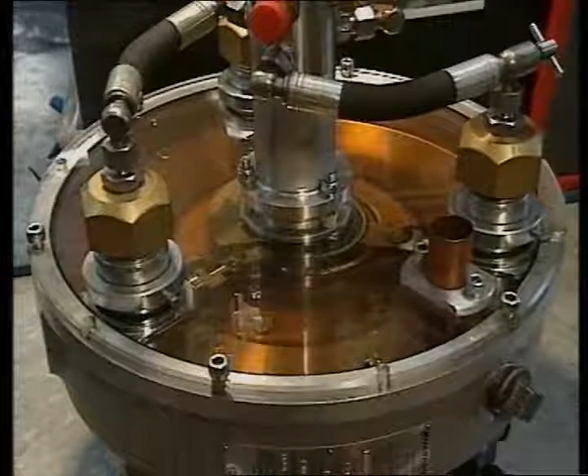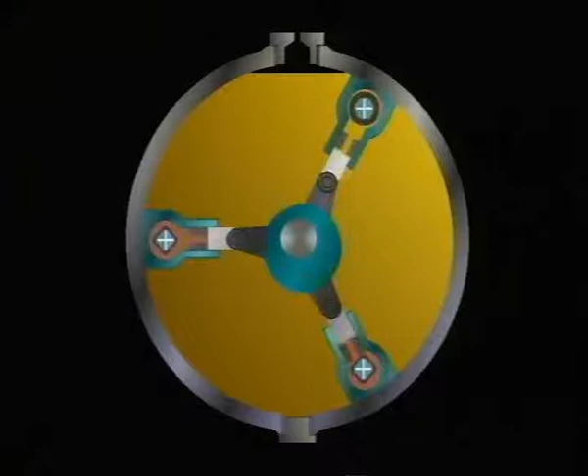The Harben P-pump is a simple and reliable high-pressure pump to maintain. We'll be showing you in this video how to service, strip and reassemble the pump and how to rectify any faults that may occur. Here we can see the pump's unique radial piston design, which has made it into one of the world's best-selling pumps. The P-pump has a maximum working pressure of 400 bar and a maximum possible flow of 77 litres per minute.

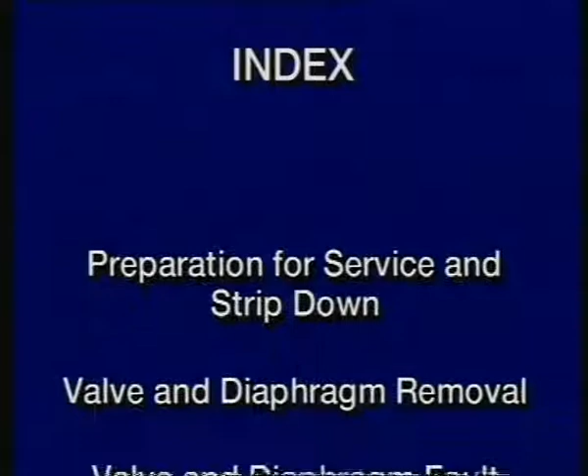It should be noted that if the pump only requires a service, it is not necessary to split the crankcase or remove the barrels. You may not always want to go through the whole video to find the parts you want to see. We've therefore indexed sections of the video such as preparation for service and strip down, valve and diaphragm removal, valve and diaphragm fault find, splitting the crankcase, removal of barrels, removal of center assembly, reassembly of center assembly, replacing barrels, replacing crankcase lid, replacing valves and diaphragms, oil and water bleed, the P-type selector, the Mark II gun, and unit fault find.

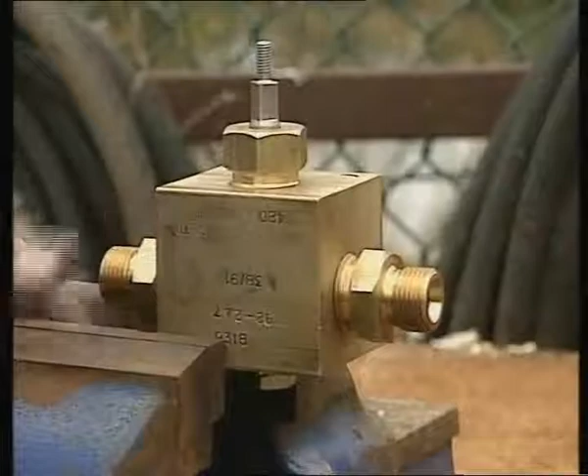At the end of the video, there's a short section on how to service and diagnose faults in the P-type selector assembly and the Mark II gun. The pump we're working on is a 6-cylinder 22mm high-lift P-pump. For the purpose of this video, we've carried out all the work on a pump stand. In the field, a pump service can be done on the machine. It would only be necessary to remove the pump if a strip down was required.

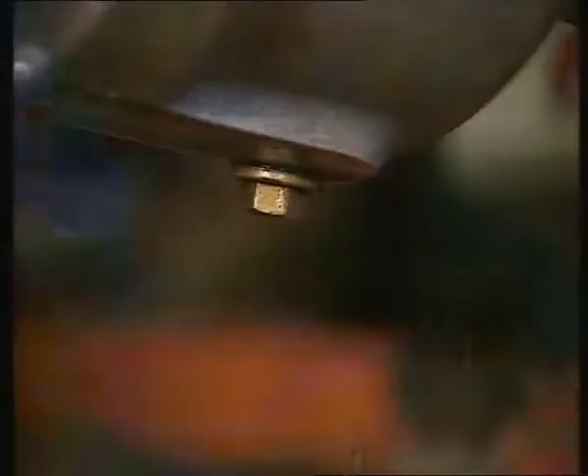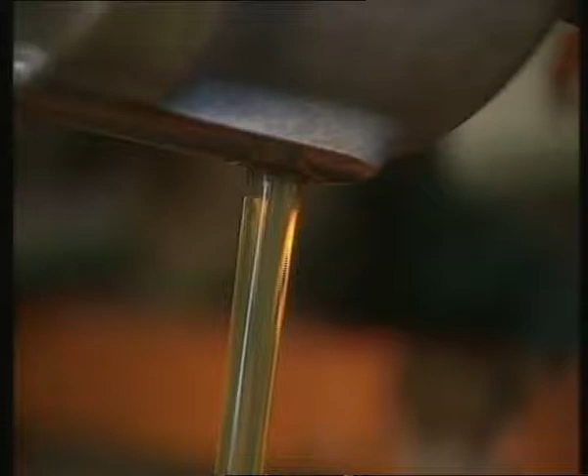The first step is to drain the pump oil by removing the drain plug located at the bottom of the pump crankcase. Once the oil has been drained and the drive coupling taken off, the inlet manifold has to be carefully removed. The manifold shown here is the old type rubber inlet manifold. On later models, a different inlet manifold and inlet nut, complete with inlet stem, is fitted. The removal and fitting are almost identical to that shown here.

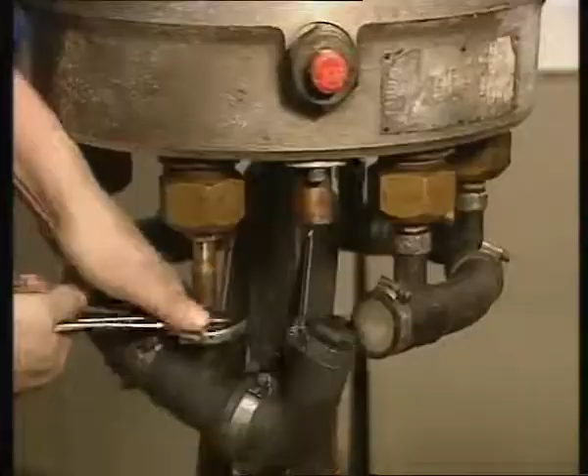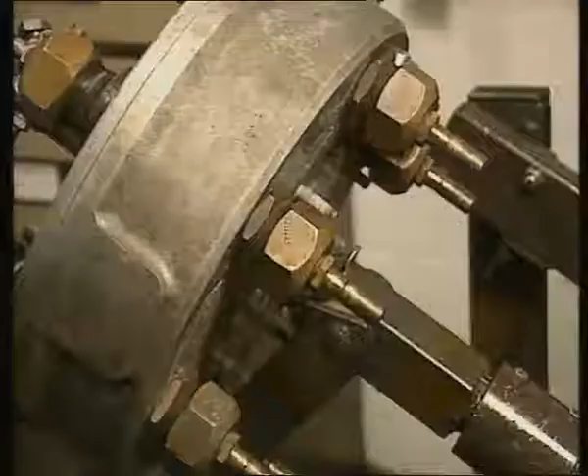We move next to the front of the pump, where the top hoses are individually removed. Once these top hoses have been undone, the valve nuts are slackened and carefully removed. Here the engineer is starting with the valve nuts on the pump's inlet side before moving to the delivery side. With the valve nuts removed, the delivery valves are gently taken out. They should never be forced, as this will damage the valve assembly.

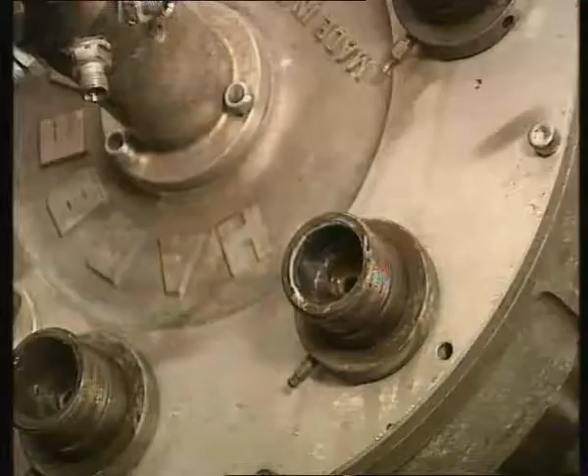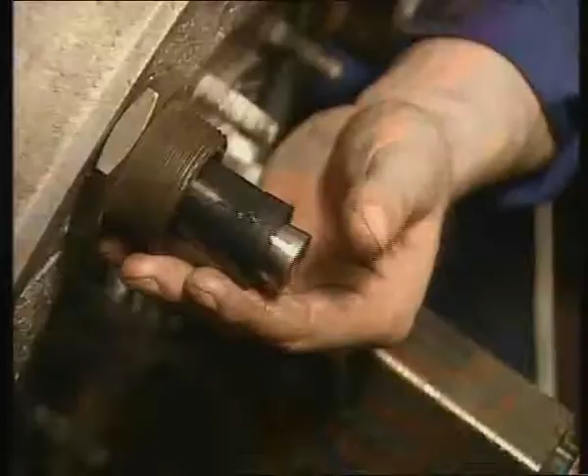The next step is to use a drift, which is located onto the top of the mandrel from the pump's delivery side. As the drift is being used, the inlet valve, and here we show a high-lift version, is knocked out. The diaphragm and mandrel is then pushed out of the barrel on the inlet side. It is important when removing parts to ensure that they're kept in order to assist in the fault-finding process. With the parts now taken out, a check should be made of their contents for wear and damage.

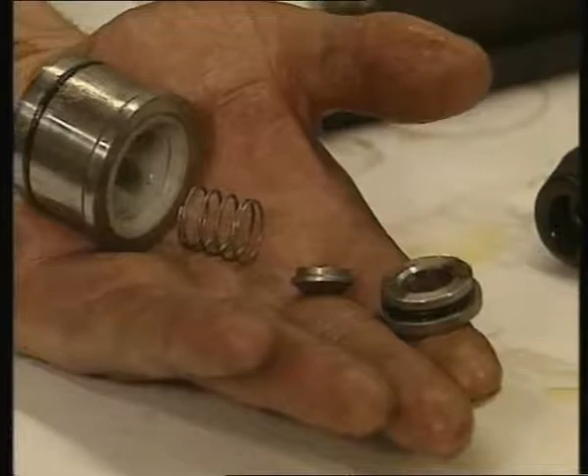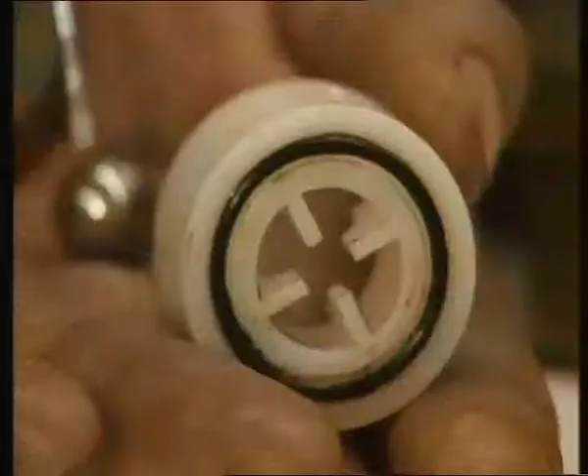Starting with the high-lift inlet valve, the type of things to look for are to check to see if the spring is broken or if there is pitting and cavitation on the poppet valve and seat. The delivery valve is checked in the same way, looking at the seat, stainless steel ball and the guide. The O-rings on the valve should also be checked.

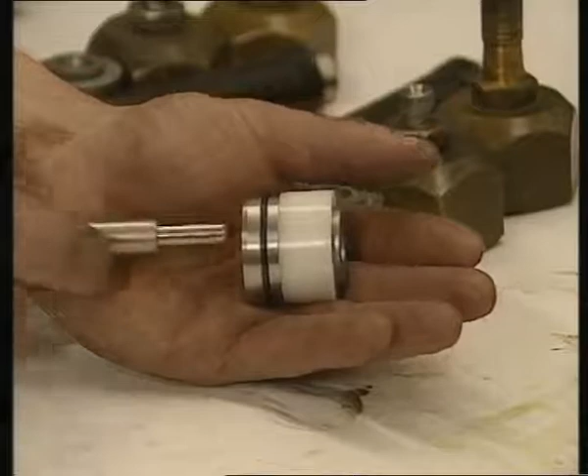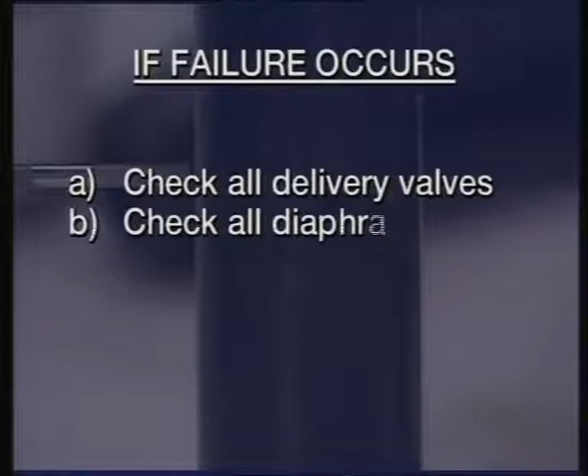If the pump is fitted with a standard ball type inlet valve like this one, the same checking procedure should be followed. The diaphragms should also be checked. Here we show 3 possible diaphragm failures and their explanations. Pepper pot failure could be due to A, worn or damaged delivery valve, or B, damaged filter element allowing debris to jam the delivery valve. If this failure occurs, you should A, check all delivery valves, B, check all diaphragms, C, replace the oil, D, check water filter. Shear failure is due to excessive running hours. To remedy, check all diaphragms and valves and replace where necessary.

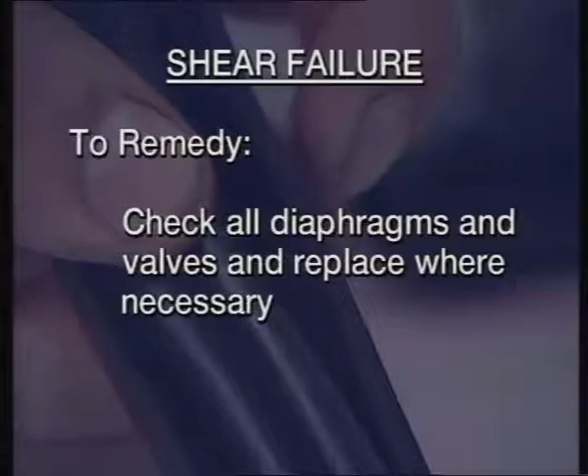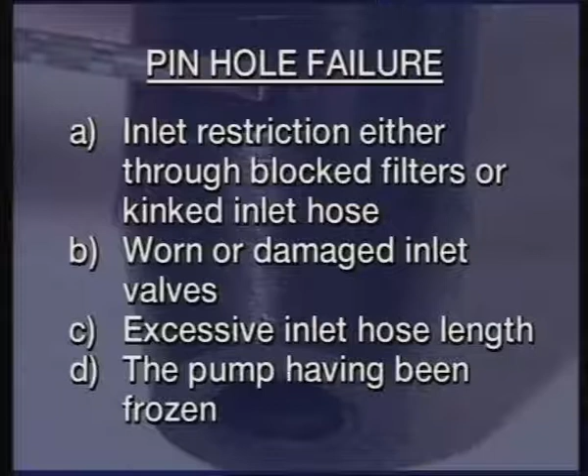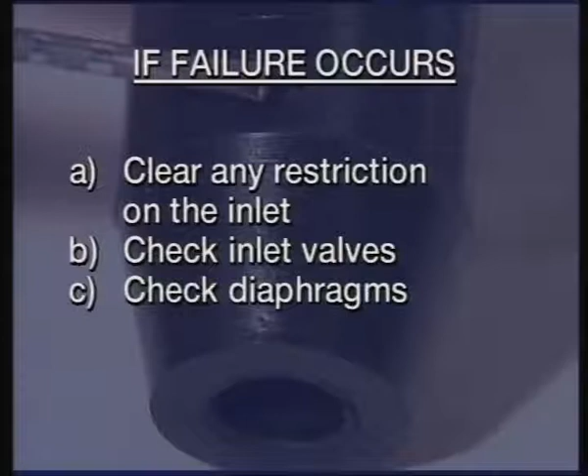Pinhole failure could be due to A, inlet restriction, either through blocked filters or kinked inlet hose, B, worn or damaged inlet valves, C, excessive inlet hose length, or D, the pump having been frozen. If this failure occurs, you should A, clear any restriction on the inlet, B, check inlet valves, C, check diaphragms, and D, replenish the oil.

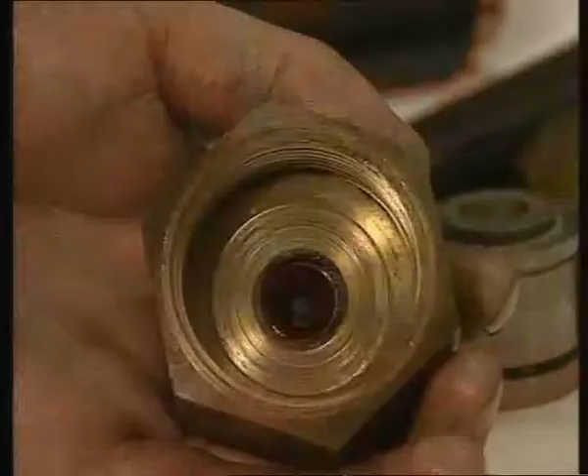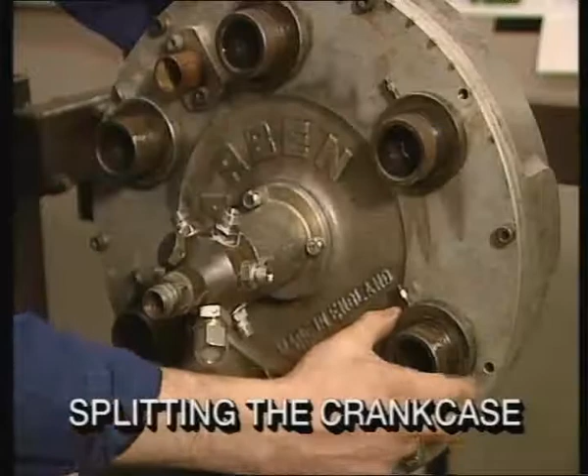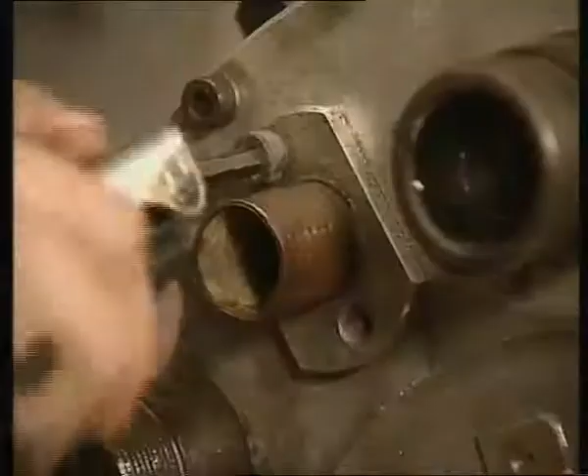To remove the mandrel from the diaphragm, use the same drift as before and gently ease it out. The mandrel can then be checked for wear and pitting. The inlet and delivery valve nuts should also be checked for damage caused by cavitation. Next, the oil bleed rings are removed from around each barrel assembly. The oil cooler plate is removed next, with its O-ring behind it.

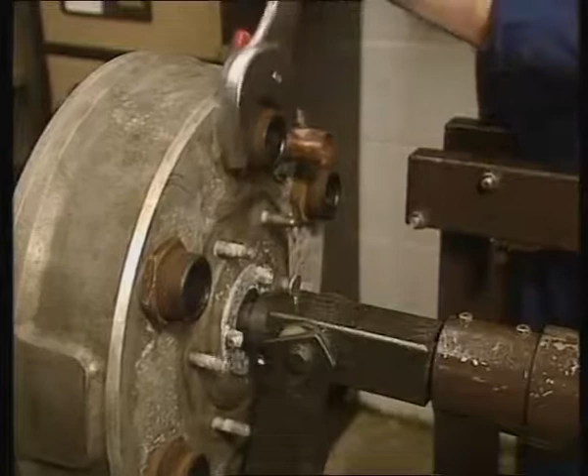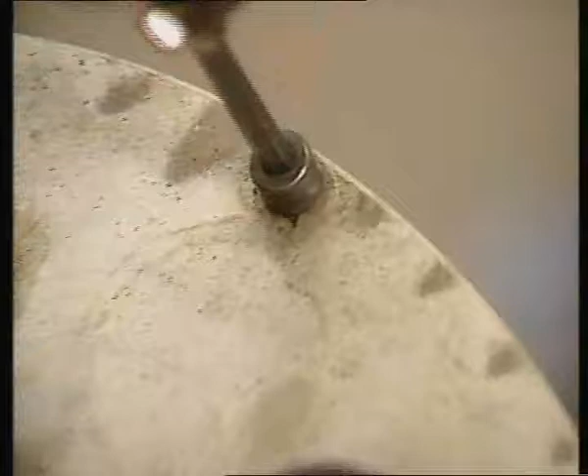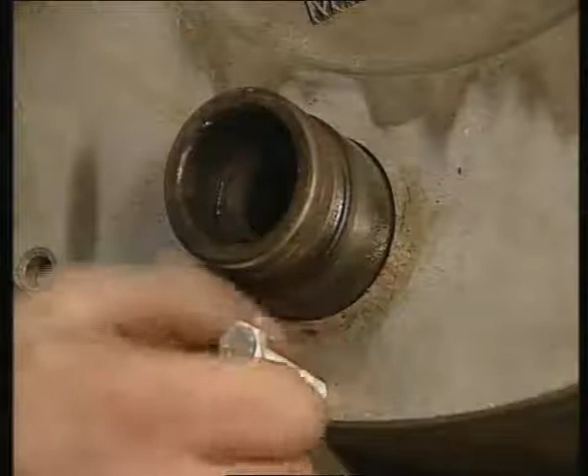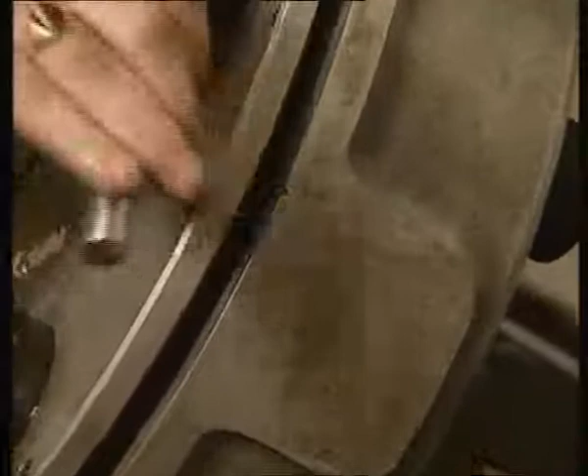This is followed by the removal of the lock nuts on the inlet side. To remove the crankcase lid, the 6 cap screws are taken out. Then 3 8x70mm set screws are placed into the spare holes located between the cap screw holes and are evenly screwed down, ensuring that each set screw is given 1 turn at a time to give even lift of the crankcase lid. Unless done evenly and in this manner, the crankcase lid is liable to split. The crankcase lid can now be removed.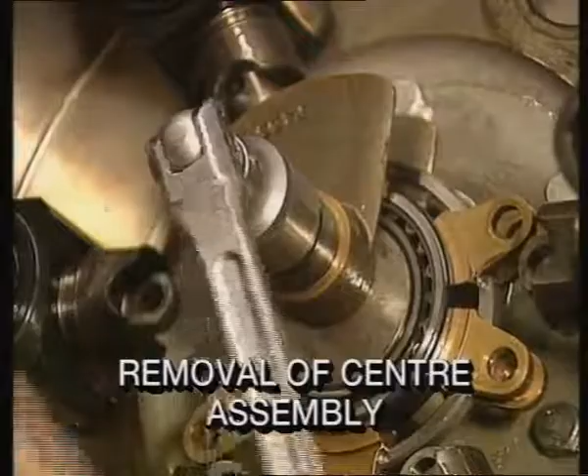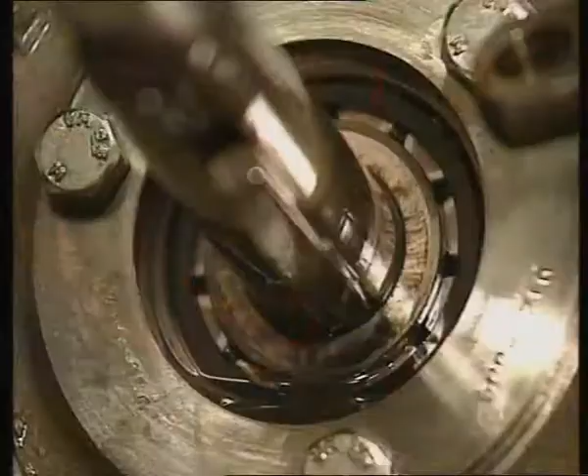In order to begin removal and dismantling of the center assembly, the 20mm nylock shaft nut must first be taken off. Then the collar and the first counterbalance are taken out. These are followed by the retaining ring and connecting rods. The main bearing. And the second counterbalance. And finally, the shaft key.

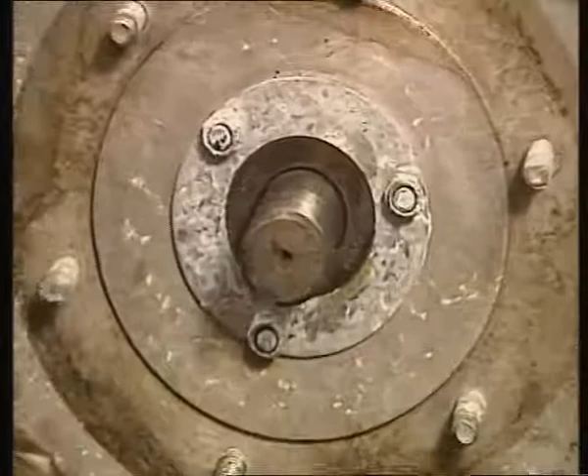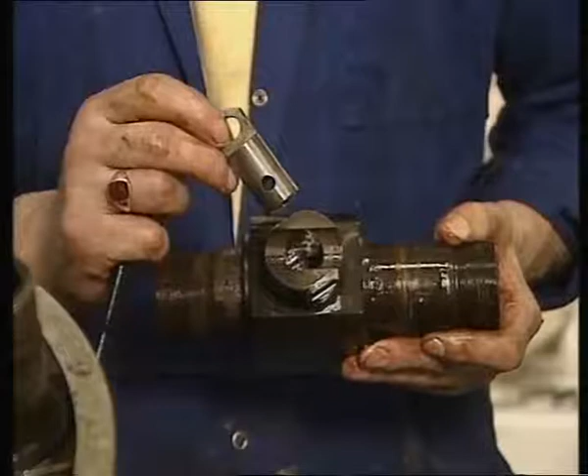On the inlet side of the pump, around the base of the shaft, is an oil seal carrier and oil seal, which should be checked and replaced if necessary. With the barrels now out of the pump, an inspection can be carried out, checking threads, oil bleed holes, and barrel O-rings. The piston also needs to be looked over to check for scoring caused by a lack of oil. Once all these checks have been done, the procedure for rebuild can begin.

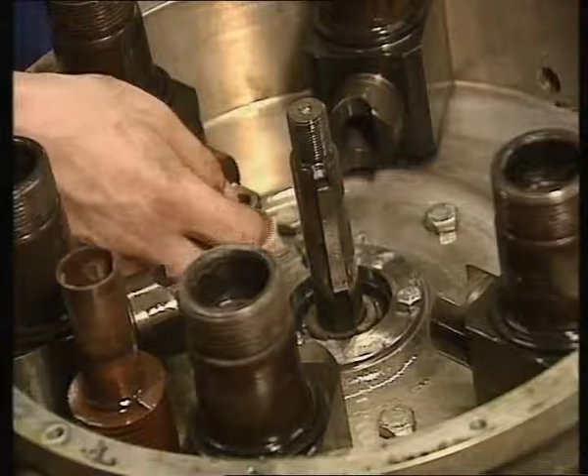First, replace the shaft key. The pistons are then put back into the barrel inner cylinders. The center assembly is then put back onto the pump shaft in the reverse order that it was removed. Counterbalance, main bearing, retaining ring, and connecting rods. Second counterbalance. Collar. Spacer. And finally, the nylock shaft nut.

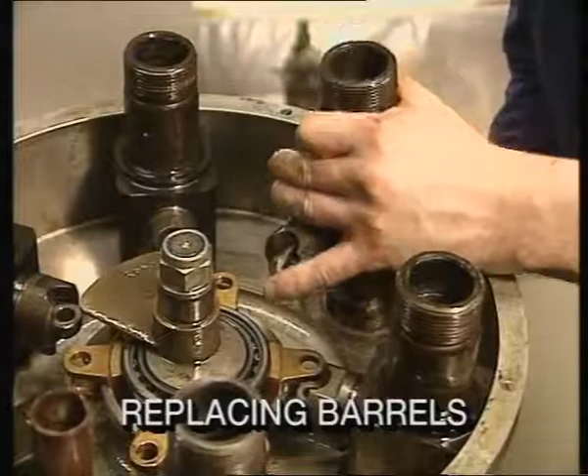It's important that the barrels go back into the same holes, otherwise the oil bleed holes will not be in the correct position. If in any doubt, consult your service manual and the section on barrel coding. All barrels are letter coded. With all the barrels back in position, the individual connecting rods are connected back to each piston with gudgeon pins and new circlips. Never use the old circlips.

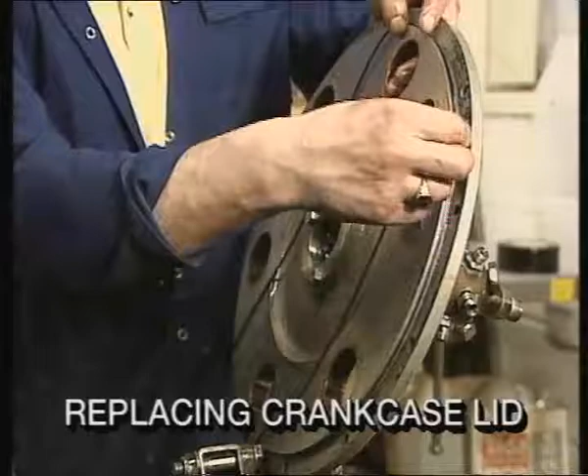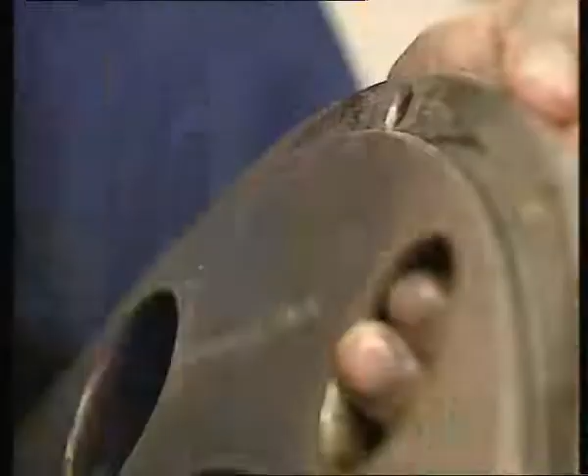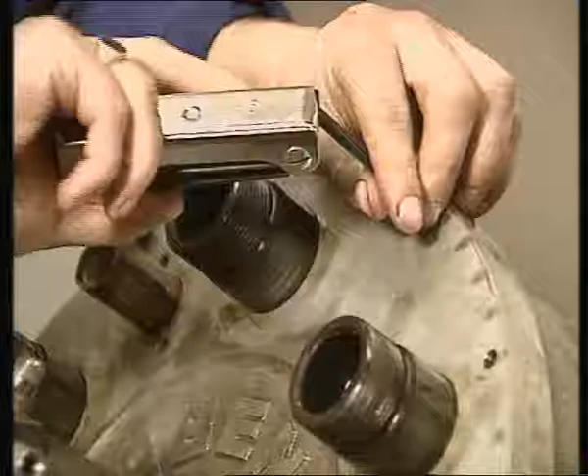Before replacing the crankcase lid, the crankcase lid O-ring is checked and placed back into position, ensuring that the join is at the top, and finally greased. The floating bearing in the center of the lid must also be checked. The lid is carefully placed over the barrels and tapped down before the cap screws are replaced and tightened. The lock nuts are replaced on all the barrels and tightened, followed by the oil cooler O-ring and plate.

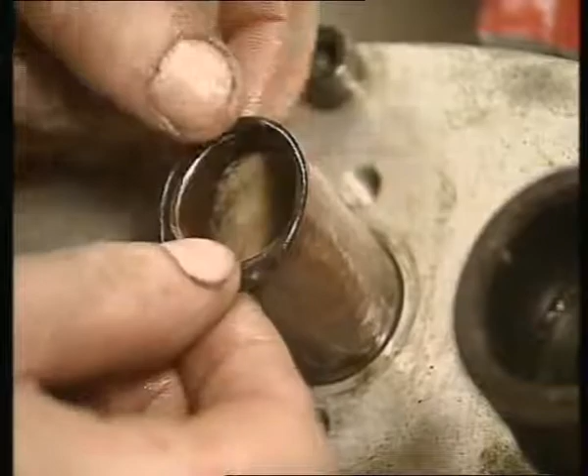The bleed rings are replaced over the barrels and the bleed nipples screwed down. The delivery valves are greased and placed into the top of their respective barrels and the delivery valve nuts screwed down.

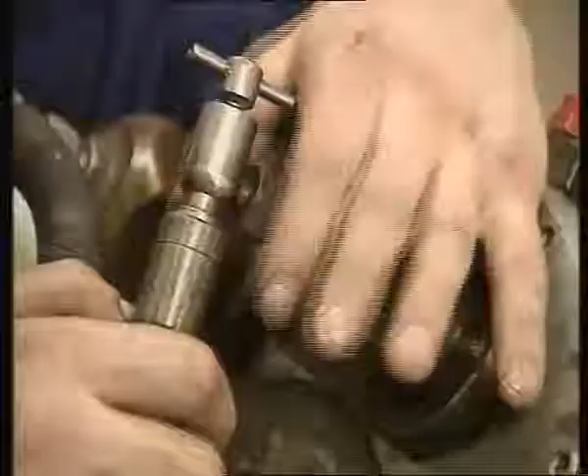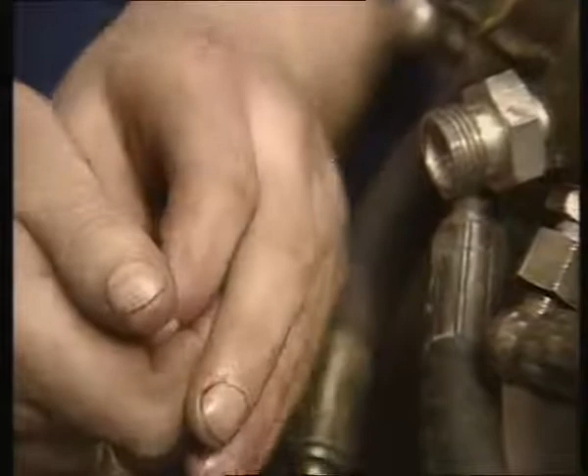The top hoses are the next to be replaced. You must ensure that the air bleed hoses are at the top of the pump, as shown here. At this stage, it's worthwhile checking the safety pressure disc and holder. Pressure discs are color-coded. The disc shown here is colored white, which indicates a working pressure of 280 bar. Refer to your Harben service manual for the correct color coding.

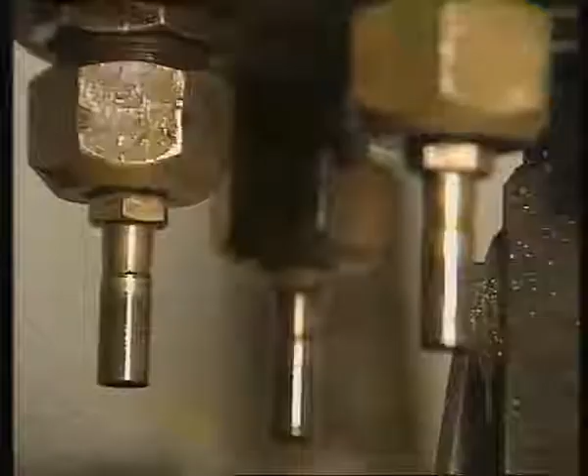We now go back to the inlet side of the pump and the replacement of the diaphragms. They are first liberally oiled and pushed back into the barrels. The mandrel is then eased up into the diaphragm before being gently pushed home using a drift. Once back in position, the inlet valves can then be replaced, and the valve nuts screwed back on. The valve nuts should be tight, but not overdone, as this could damage the valves. Before replacing the inlet manifold, the inlet stems are oiled. The manifold is then replaced, and their collars pushed back into position.

The hose clip, where the inlet manifold is connected to the oil cooler, is tightened to complete the manifold replacement. With the drive coupling and bell housing replaced, and the pump back on the machine, the oil should be filled via the plug on top of the crankcase and bled.

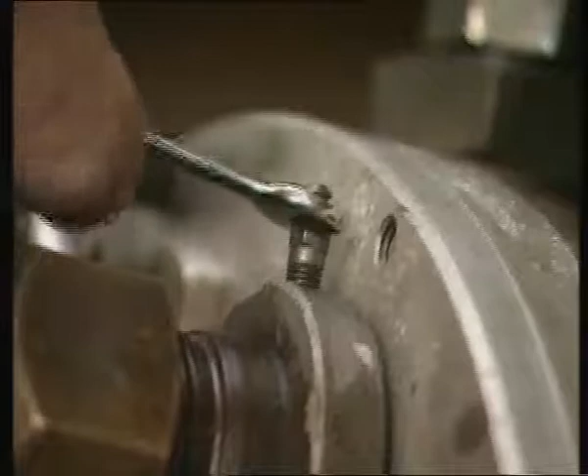Here we see how the oil bleeding procedure should be carried out, starting with the bottom barrels and working upwards until all the air is dispelled. The pump should be running in the dump mode whilst it's being bled.

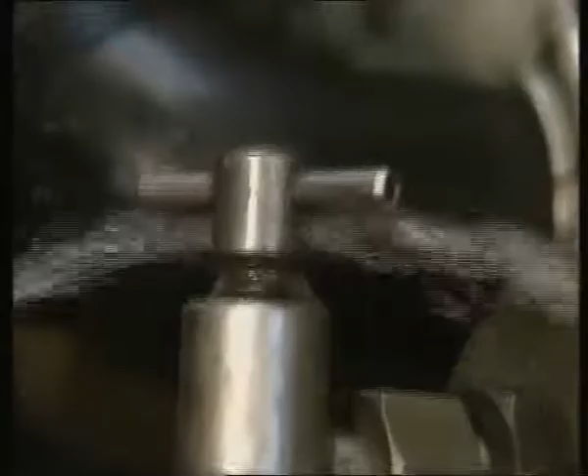The water should then be bled using the air bleed screws on the top two delivery hoses. Once the air has been dispelled, the screws can be done back up to complete the water bleed procedure. The pump is now ready to be run up to pressure.

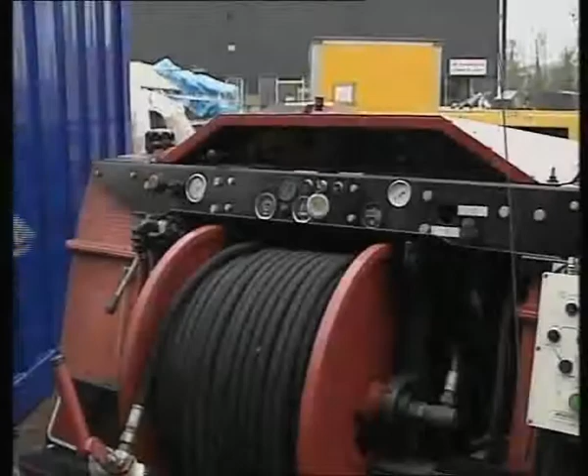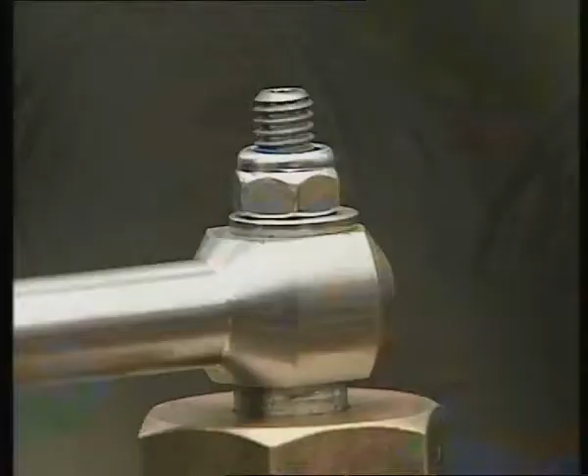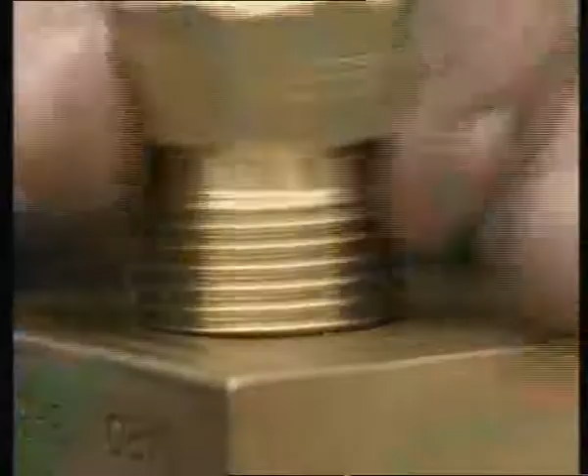To get inside the selector, we first undo the fitting connector with its seat and check for wear. The next step is to remove the handle and to unscrew the gland nut. The gland nut is taken out, complete with the shaft, backup ring, O-ring, seal and support. These should be removed from the shaft for inspection.

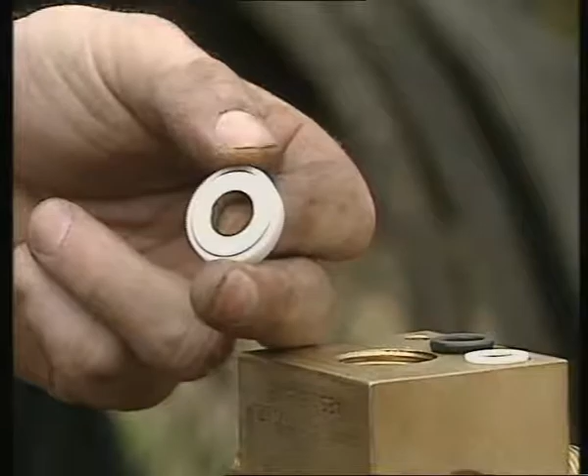The second selector fitting with its seat is now removed. The seat should always be unscrewed from the fitting and checked. The selector plug is now eased out and checked along with the guides.

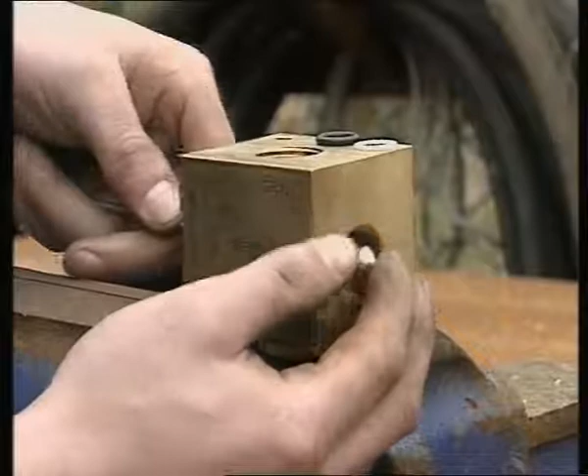When replacing the shaft, care must be taken to ensure it's fitted the correct way round, otherwise high pressure and dump modes could be reversed. It's then put back into the selector body, followed by the O-ring and backup ring, and the gland nut tightened down.

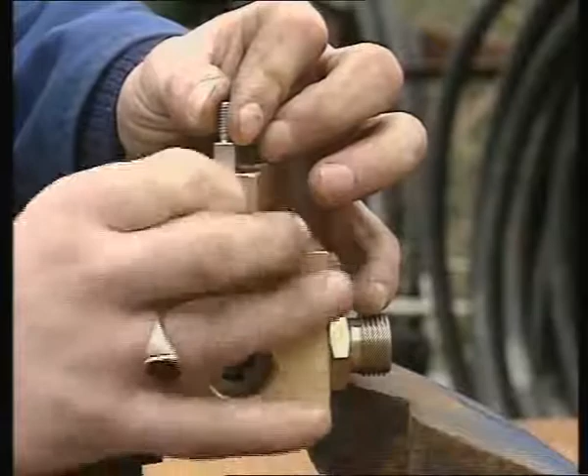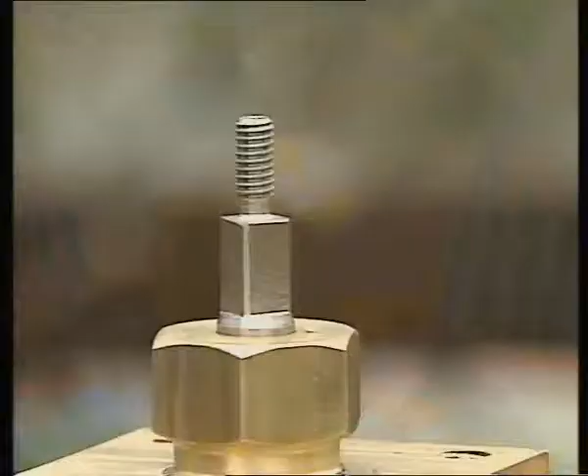The selector fittings are now replaced and tightened. Finally, the handle is put back into position over the shaft and tightened down by means of this nylock nut.

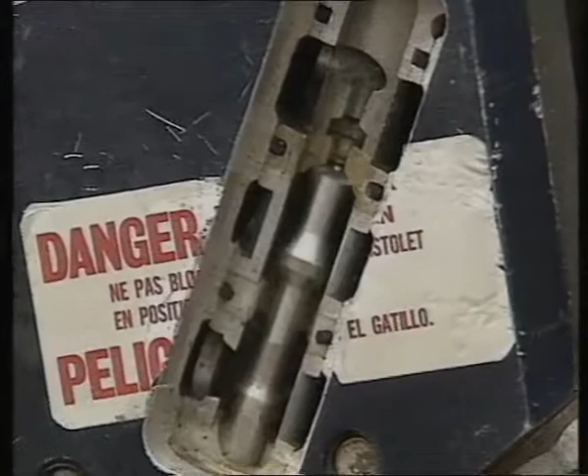Before we learn how to service the Mark II gun, we first look at this cutaway, which illustrates how the spindle arrangement inside the body functions. To begin servicing, the gun is first placed in a vise and the guard and trigger are removed. The body nut, shown here, is unscrewed, and the spindle assembly is pushed down and out of the body using a nylon drift.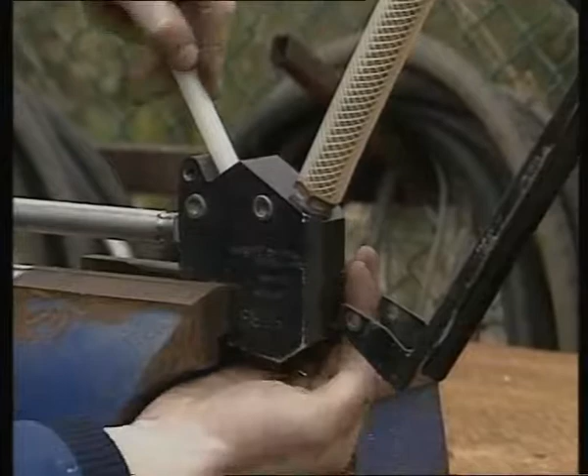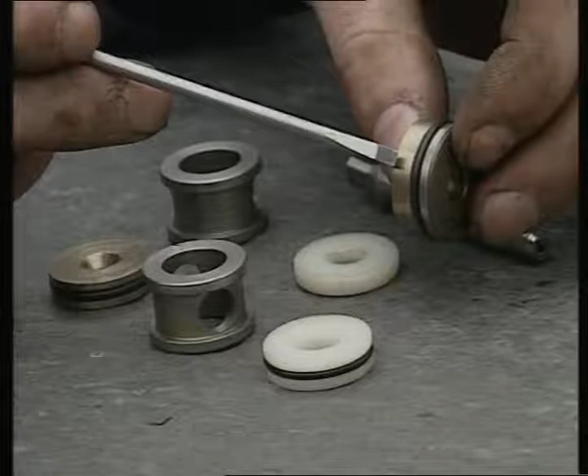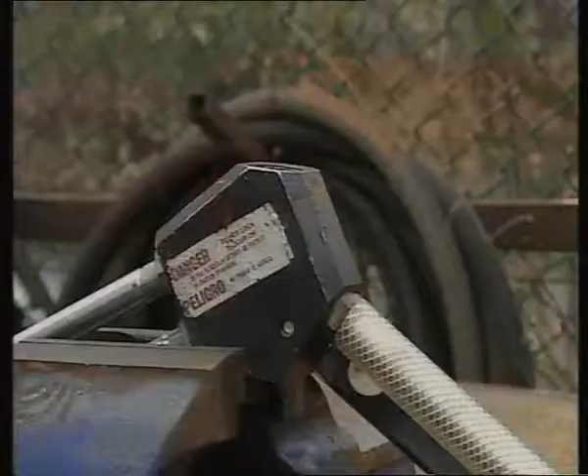The spindle's individual components are removed and laid out in their correct order for careful inspection. It's important to check all seals, O-rings and seating faces for wear and damage. Reassembly can now begin by first replacing the spindle's components in the correct order: the dump seat, collar, spacer, and the seal support with its energizer and seal. These are now carefully reinserted into the gun body, with the collar and high-pressure seat the last to go in.

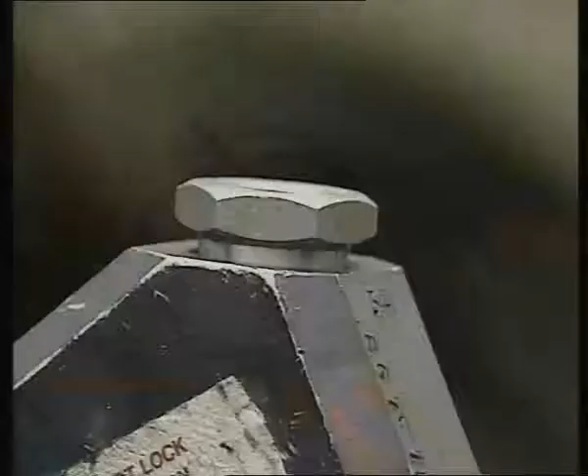The nut can now be replaced, making sure not to over-tighten it, as this can cause the trigger mechanism to stick. The guard and trigger are now secured back into position, making sure that the guard does not interfere with the trigger operation. The gun is now ready to be tested.

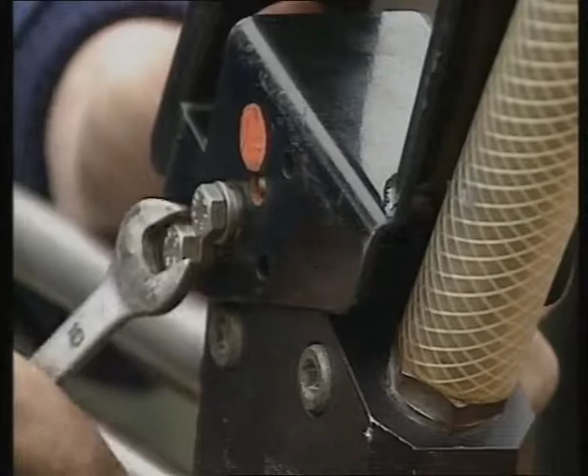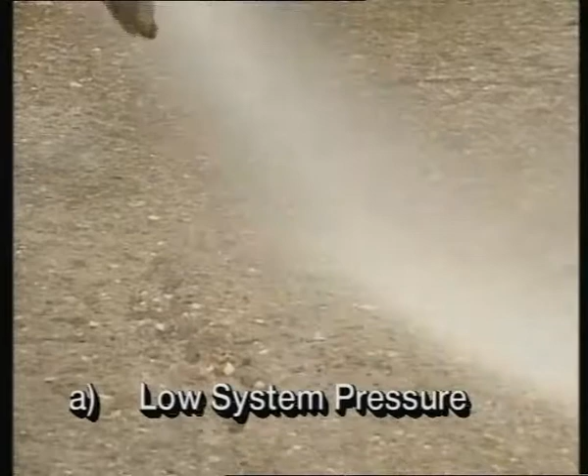When jetting, the faults most likely to occur are: A. Low system pressure. If this happens, checks should be made to the nozzle size, leaks on hoses and connections, and water loss from the selector. B. Pump not running evenly. To rectify this problem, bleed the water and oil, check the inlet filter to see whether it's blocked or damaged, and check the inlet line for restrictions.

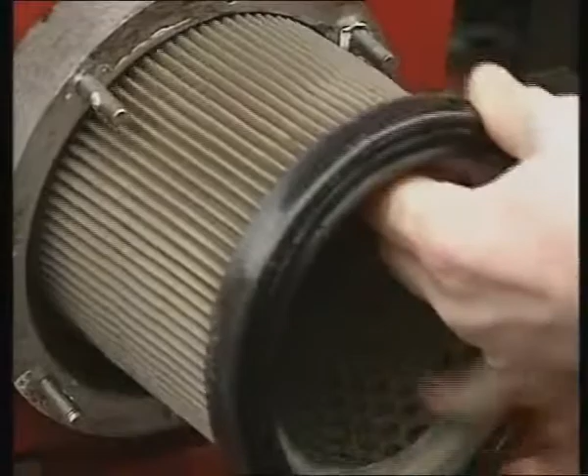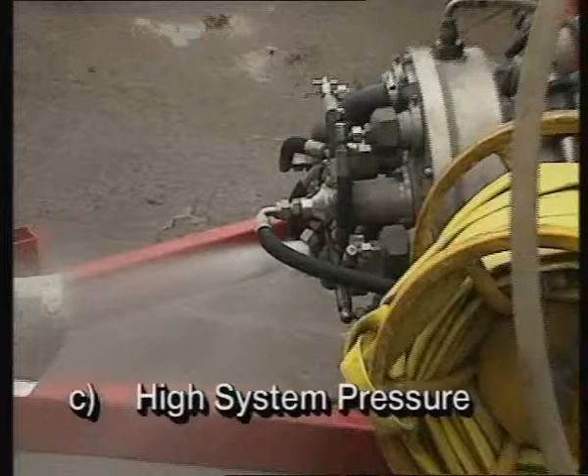C. High system pressure. This will cause the pressure disc to burst, and checks should be made to the nozzle size, a blockage in the nozzle, the hose bore, and that the gun is not fitted with a choke. For further in-depth fault-finding procedures, refer to the fault-finding section in the Harben service manual.

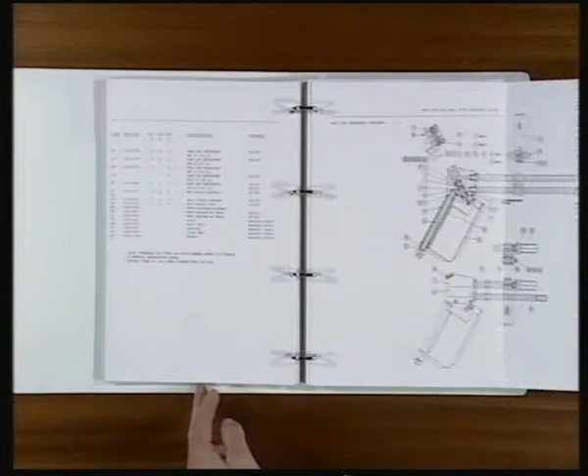It's recommended that all service work is done in conjunction with the Harben service manual and that only genuine Harben parts are used. If you come across any further difficulties not covered by either the manual or this video, we would recommend you contact your nearest Harben distributor or the main factory for further assistance.